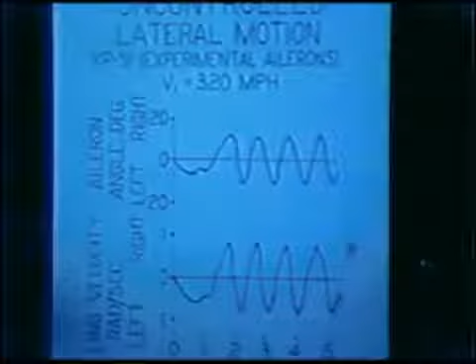To show that you can't just do that without something happening, this is what was experienced with those ailerons when they were first flown at 320 miles an hour. Not only did they give a peculiar feel to the pilot, as though the ailerons were going to snatch out of his hand, but when he turned them loose, they oscillated, which was totally unsatisfactory.

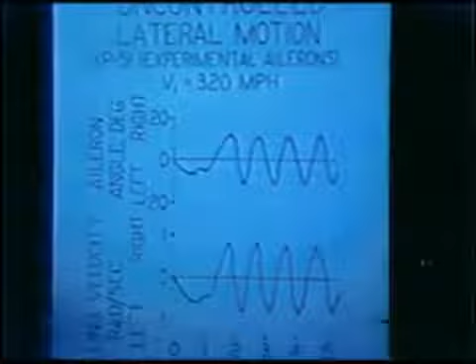So what they did is reduce the size of the bevel at the trailing edge, and put the geared tabs back in there, which had been there originally, while keeping the full deflection they had opened up, plus and minus 20 degrees instead of plus and minus 10. Then they had very satisfactory aileron control.

As you can see from this chart I put together, the XP-51 originally was down in here, but it did not meet its 0.04 pb over 2V, even within the 50-pound stick force. Now, I don't know what you think about 50-pound stick forces, but I think that's awful high. It would cause internal injury for me in some cases, trying to wrap it over this way.

And that was published in 1943, and .09 is still required for fighter aircraft, although today they start specifying it in terms of bank angle in a certain time period.

The airplane in that configuration was a delight to fly. And might I point out that that XP-51 with the modified ailerons is the one that the Experimental Aircraft Association has at Oshkosh in its museum. I got in touch with Paul Poberezny as soon as I learned they were picking up this airplane from the Smithsonian, and I gave him the information on the aileron so he wouldn't try to tear them apart and put them back in the original condition. But it has those originally bevel trailing edge ailerons on it still.

Well, in the early part of the war, P-38s and P-47s began to run into this compressibility effect. First serious situations occurred with a P-38, and of course it had a great big elevator back there with no aerodynamic balance or power system in those days. And they would get into the tuck, and the buffeting was very severe, and they lost a couple of tail booms and tail and killed at least one pilot, and I think they probably killed two in dive studies.

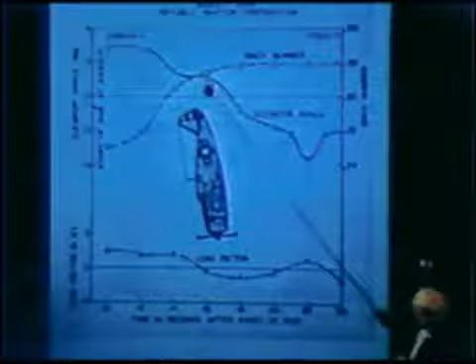But as he crosses about 0.78 Mach number, there is a tuck. And he's pulling back now on the elevator. But the load factor comes up and starts down again, and he puts on more elevator. Here he applied at least about 200 pounds, and he effected only a half a G, but he didn't even recognize it because he's over on his back.

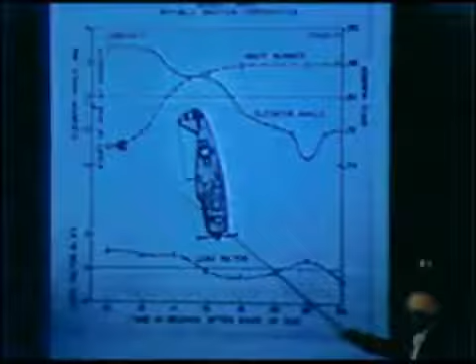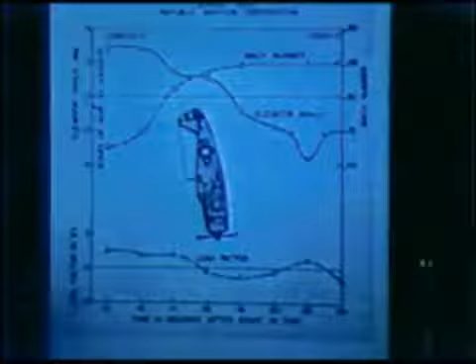It didn't seem like very much to him. So he eased off, and the reason he recovered—by the way, the Mach number rises and levels off at 0.86—is that the drag buildup at lower altitudes, due to shock on the wing, slowed him down. That's how many pilots in fighters throughout the war, enemy and ours alike, recovered: because of the slowdown due to drag.

0.86 is as fast as we think anybody flew, except there was an exchange in Aviation Week a couple of years ago where the British claimed to have dived a Spitfire to 0.92, out of control. But this was out of control too—he couldn't control it until he got to lower altitudes. So maybe they're right: we got to 0.86 with no difficulty controlling it, but they got to 0.92 out of control. So perhaps the Spitfire was the fastest.

The Spitfire was much lighter than the P-47, but had a thinner wing by 4%. It had NACA airfoil sections, 2213 to 2209.4, on the British Spitfire. Anyway, you can see what the situation was.

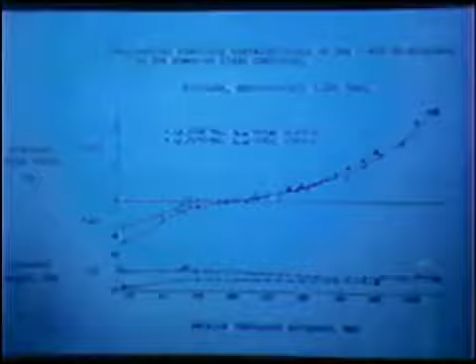Here was another aircraft that gave a lot of trouble, the SB-2C. It went by various names, SOB. It was one of our prime dive bombers, and the story is it never did pass its dive demonstration test, but they put it into service anyway. It was very much unstable, too, and they wanted to use it on carriers, so NACA was asked to provide a pull force to prevent the pilot from stalling the aircraft on his landing approach and landing.

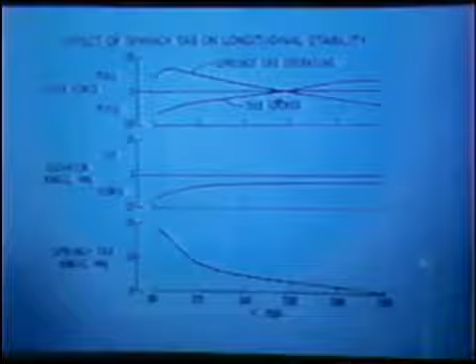So bear with me here. Here is the stick force. We put a tab on it that was spring-loaded to the up position, so that at low speed it would be deflected upward, and at high speeds it would fold back down to streamline with the elevator. That's what this tab locked means.

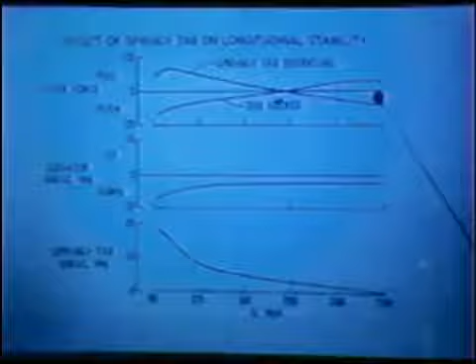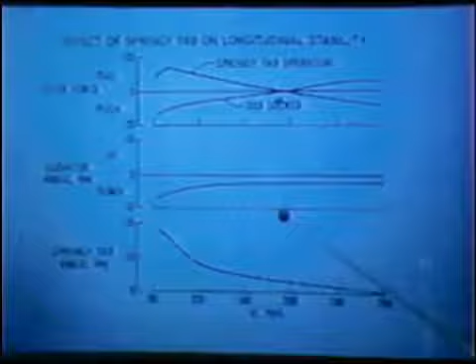In the original condition, on this aircraft as you approach the stall, the stick force required was a push until at the stall my finger was against the instrument panel and it rolled off. The elevator angle is the same way, quite unstable, stick fixed.

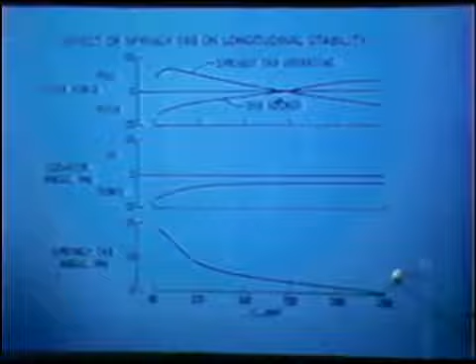There's something else that's coming up. I want you to distinguish between stick fixed stability and stick free stability. With the springy tab operating now, that spring deflected upward as you slowed down, and it gave a stable variation of force with speed.

So it did prevent stalling. Even though your hand for each trim position was moving up to the panel, it still required a pull force. The springy tab was doing this, up, and then would straighten out. So that seemed to solve that problem.

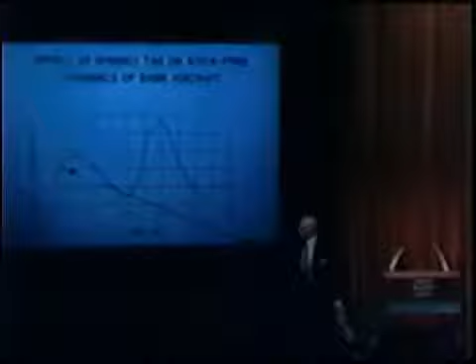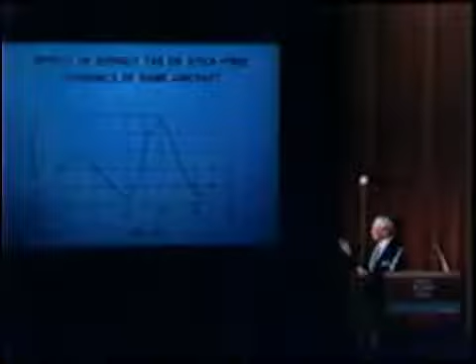However, I was curious about what this did to the dynamics. So I set the thing up at the same trim we had on the last test and just disturbed it by 3 miles an hour in a push direction, and then turned it loose. It built up very quickly into a large dynamic oscillation. That's because in order to change the spring, the tab at the trailing edge had to gain some speed.

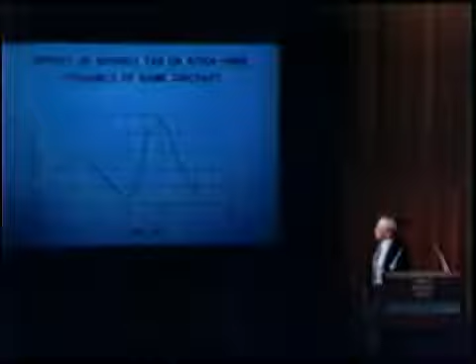Now, this is an illustration of the fact that you can provide stick free stability, but not have stick fixed stability, and that will cause a problem.

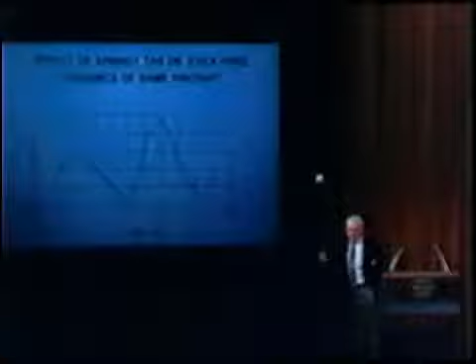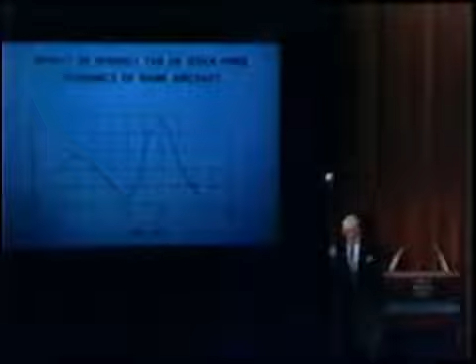The sad part is, I think, that the FAA does not require stick fixed stability in any airplane. It requires only stick free stability. This is a big mistake, because there are some general aviation airplanes flying today — one which they tried to certify at 25,000 feet had stick-fixed instability, even though it had a device to give stick-free stability. That thing diverged so violently it scared people in the certification process.

And you've got other airplanes that aren't quite as badly off. They're flying with stick-fixed neutral or negative stability, but they have springs loading up the elevator so the trim tab provides the force.

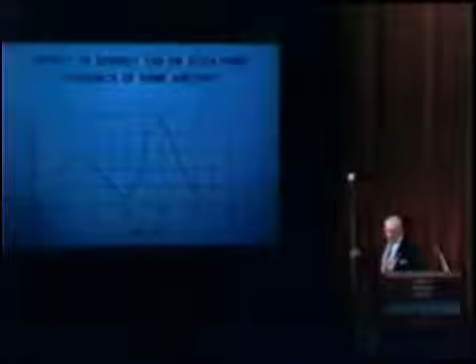Or the bob weights provide a force that the trim tab trims out. The trim tab position then provides a force that gives you stick-free stability. But here's the case: the higher you go in altitude, the less damping there is to the rotary motions, and the more wild these gyrations become. This kind of characteristic at low altitudes would just make the pilot work pretty hard, because the airplane would always be tending to diverge.

The P-63 was referred to Langley because the pilots said they couldn't keep their guns on the target. This is normal acceleration, and the airplane was pumping in the turn. With instrumentation, it turned out that it was related to directional oscillations and the side slip, and the pitching moment that the side slip generated was the thing the pilots objected to. So the solution wasn't very difficult.

But they never did adopt this fin. They put on some dorsals and ventrals eventually.

This is the same P-63. Many of these airplanes had closely balanced elevators, and the force per G variation with center of gravity was of concern. In this particular aircraft, they went to the bevel trailing edge to balance the elevators, and it had a bob weight. In plucking the control, it oscillated this way.

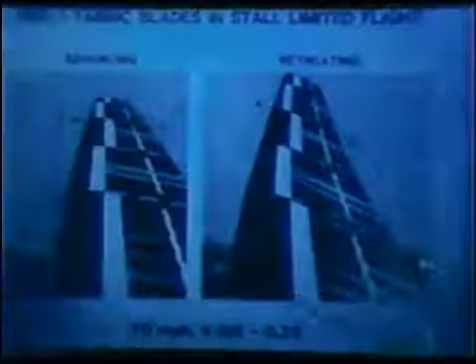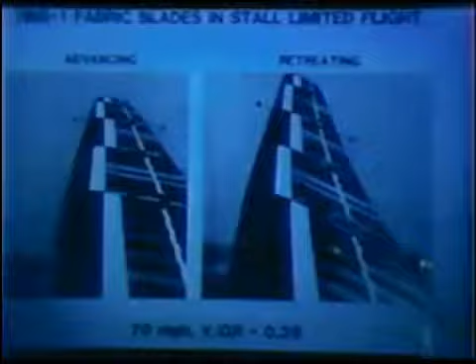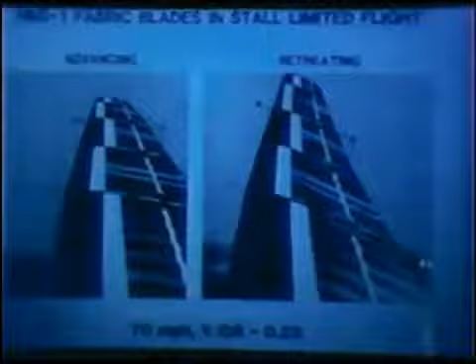As the aircraft flies forward, there's a high velocity on the forward advancing blade, but when it gets downstream, the wind velocity reduces its airspeed over here, so you have to rotate that blade or feather it to a higher pitch. You can approach the stall, and we were interested in when the stall begins at the tips and when it's limiting. This is a case at 70 miles per hour where we started out, and at full power at 70 miles an hour, there's no stall at the tips.

Then in slowly increasing the pitch at that same speed, it begins to stall at the tips at about a 12-degree calculated tip angle, and that's where your performance starts to go bad. This is at 16 degrees where the rotor blade is stalled for a good part of its way out.

This tuft here is going forward. This one's standing straight up. That one is still wiggling aft. This one's going outboard like a swept wing sort of thing. So this was pretty badly stalled.

The vibration was heavy. The stick was hard against the left-hand stop and about 1 inch from the forward stop. That was considered the limiting flight condition for this particular rotor. It's published in Al Gessow's book if you want to see how it looked. But it was very carefully approached by slowly pulling up the collective pitch, keeping the throttle full open.

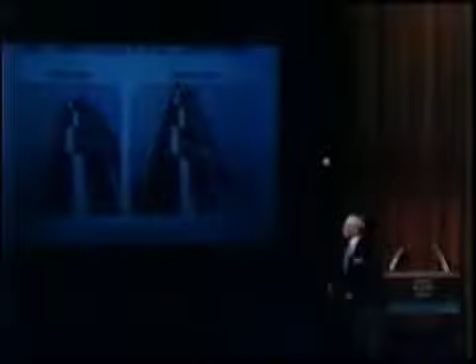During these performance tests, where we were looking at high speeds and so forth and noting power required and things like that, I noticed it was quite difficult to maintain steady flight. Now, everybody knows that the rotor advancing into the wind has a stability with respect to speed, because the blade over here with high Q will tend to flap up and the one retreating will tend to flap down. So it's a stable sort of a pitch up, it tends to slow you down. But most of them overlook the angle of attack change.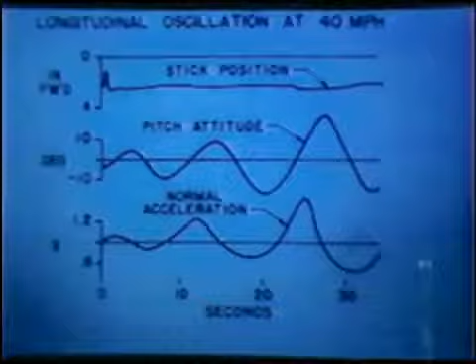Anyway, so I decided to make some tests here just to get a handle on what was happening. So I just trimmed it up and made a step function there to disturb the machine, and it began one of these oscillations. This is at 40 miles an hour. It expanded, and that interested me because I said, well, what's going to happen at a higher speed?

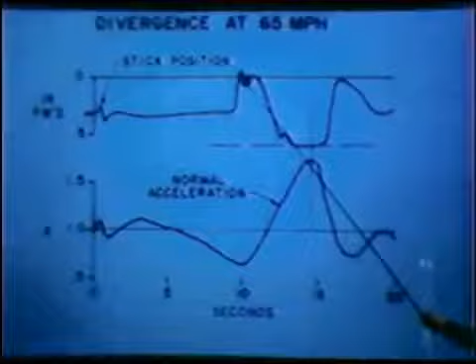So we tried it at a higher speed. This is at 65 miles an hour, and here's a little step function again. The aircraft noses up and then noses down and is diverging. I put in a good deal of control, and then it starts diverging upward. I slammed the control against the stop, and it still continues. And in there somewhere I jammed the pitch down to the minimum and...

Rolled off over the top. But that convinced me and other people that there's an angle of attack instability, which is much more powerful and more important than the speed stability. It had to be dealt with.

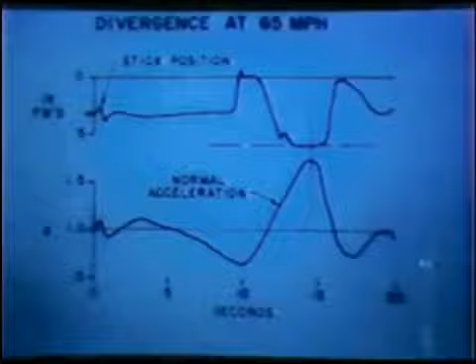Well, the way we dealt with it, we didn't try to work with the R4, the HNS-1, but the Navy was interested in our handling qualities work, and provided this HO-3S, which was the Army R5, S-51 commercially. And it diverged just like the R4.

I remember taking Hack Wilson for a ride, and I got it all trimmed up at 80 miles an hour, and I said, now watch, Hack. Within 3 seconds I had to take over because it had diverged to a serious nose-down position. But anyway, we put a tail on it, and that stabilized the aircraft. If you stabilize the fuselage, the rotor will respond to that stabilization and maintain a constant attitude.

We later hooked it up to the longitudinal control, and then we had an elevator combined with the helicopter, the feathering of the rotor. We did a lot of helicopter handling quality studies in the basic helicopter, and then had a hydraulic system installed, and eventually electronics to make it a variable stability aircraft.

And then we went to instrument flying, and I missed a step there. I wanted to say that in the early days when we had these sticks that walked around in the cockpit at 1 per rev, they shook, vibrated, we couldn't get data on stability in turns or in the maneuvering stability, because the stick was rough, the stability was so low that we couldn't get measurable deflections that weren't hidden by the

And this airplane oscillated between 8 plus and 8 minus G here for quite a period of time, and I don't know how he regained control. But the Air Force bent 13 airframes with this kind of a PIO, and then they made a tour of the industry and us and so forth to find out what you could do about it. I think the only thing they did was to put a much stiffer spring on the valve. It was traceable to valve friction. And but then the maneuvering forces get to be high.

I want to explain, PIO is not easy to deal with because when you're being thrown up, you try to put in a command and then wham, and you're hitting the ceiling with your head or against the straps, and then you're being slammed down into the seat, and it's very difficult to apply a small corrective action to stop this thing.

Even in the demonstration, I was out of phase. But a PIO is not to be laughed at. It's a very serious situation when you encounter it, and you hope you never see it again.

This is an F9F2. The flight research gang looked into fly-by-wire systems back in that period of time. This is an F9F2 jet Navy fighter. We had put the electronics in it. This shows one control arrangement.

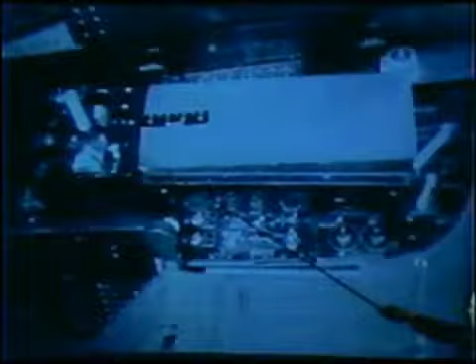We looked at rigid sticks in the center, on the side. This is a displacement stick with the arm resting on this pad, and you use your fingers like a pencil. That was the most liked control system arrangement. Pilots would fly at altitude, maneuvers, and come back and make takeoffs and landings with that, and like it very much. We had rate command, attitude command, and normal acceleration command, and they all liked the rate command best.

I flew there for a little while. And if you let it go too long, you had the feeling you weren't going to be able to check it. We had a sack of BBs in the back. We could pull a ripcord and dump them to move the CG forward, so there was that escape.

This was our last high-performance airplane. This is number 58. We got two of these F8U3s, and all the spare parts they had, Chance Vought, to continue high-speed research. We did do sonic boom work with it at Mach number 2 at 60,000 feet.

But then we had to get rid of it. They used it for target gun firing, to see what damage you could do with gunfire on the fuselage. Sad, but we had to get rid of it, and all of our airplane programs disappeared. We were limited to helicopters, VSTOL, and necessary transport.